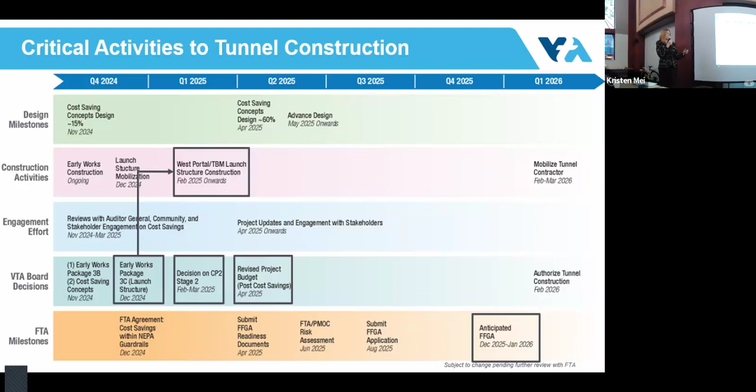Any other questions? So on here, you will see all of the activities that need to happen in board decisions, once again, to get to the point where we can do the FFGA. And what's really important on this illustration is that we have to have all of these things happen, and we have to have a full funding grant agreement to award that next big contract for tunnel and track work.

It's a big contract, so we have to demonstrate that the project's fully funded. So all of these steps leading to that are critical. So we are doing everything we can to really stay on this new schedule, to get the project going as it currently is, and then be able to continue with the large contract.

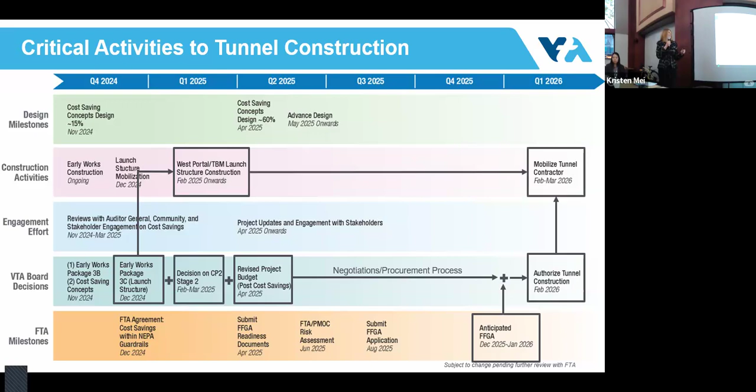So for our FFGA application, this is the strategy I talked about a little bit before: engaging you all, getting your input on the cost saving candidate changes that we proposed.

And we've really let the board know where this group and our design review committee members' input has already made some tweaks, as far as some of the station configuration elements. Such as, we started at 28th Street Little Portugal with a round station, then we went to a square, and now we're back to a round. At downtown, we've gotten a significant amount of input.

We had started with kind of a very domed roof, and then we had flattened the roof, and now we're back to the dome. I know we may have some other slight tweaks on how that's displayed visually, but we're working through that with you all and have relayed that to our board.

And I think we're going to be doing some kind of summary document, because I think it really helps to have all the input that we've got down on paper. As I said before, advancing this design really helps us get informed decisions on the next contracts and everything.

And then we have applied for about 100 million in state grants. Thank you all, I know some of you have provided support letters to help us in doing that. So we're working that gap from both sides, looking at every opportunity in addition to cutting costs on the project to see what other kind of revenues we can tap into. And then we'll have our final revised project budget so we can submit our documents to the FTA.

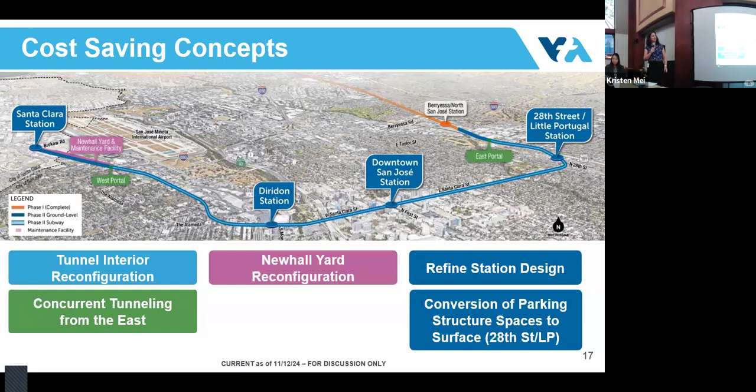For the tunnel interior reconfiguration, we're continuing to analyze efficient internal structures to simplify the design and construction methodology, to cut costs there. We're continuing to analyze that moving forward.

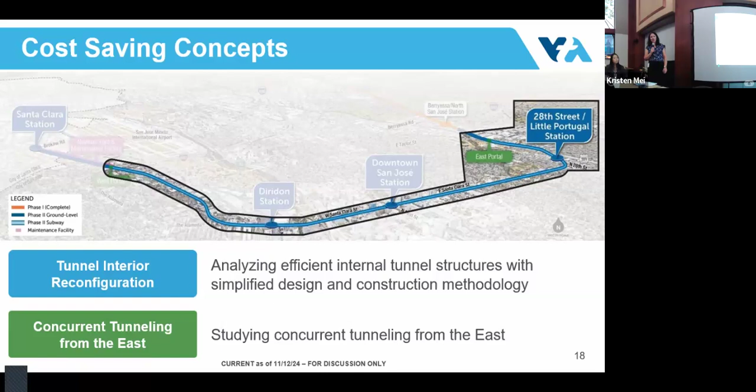We're studying concurrent tunneling from the east, as well as the single bore tunneling planned from the west. We're evaluating options in close coordination with BART regarding vehicle storage capacity and the different maintenance areas at the yard, and what we can do to refine costs. And at the stations, we're continuing to work with you all and the community to implement the vision for the stations, optimizing the facilities while maintaining the passenger experience.

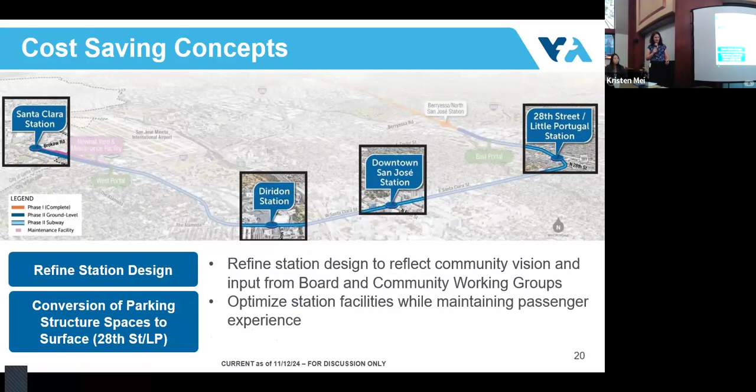So we're going to do a little deeper dive into these. Question: tunneling on both sides would require two TBMs, right? Correct—tunneling from both ends, the east as well as the west, would require multiple tunnel boring machines.

So we would expect the cost savings to come from reduced time. Yes, the cost savings for that option would be associated with schedule savings from being able to tunnel from both directions to reduce the overall tunneling time.

On the coming slides we have evaluation criteria, which we've shown before, but as a quick reminder: pluses are a positive change, equals are no change, and negatives are a negative change. So the indicator is associated with the change, not the cost. The evaluation criteria haven't changed from what we showed before: cost savings, O&M costs, access and orientation, TOD and placemaking, station presence, passenger experience, and sustainable design. We walked through these with you at the October 8th meeting.

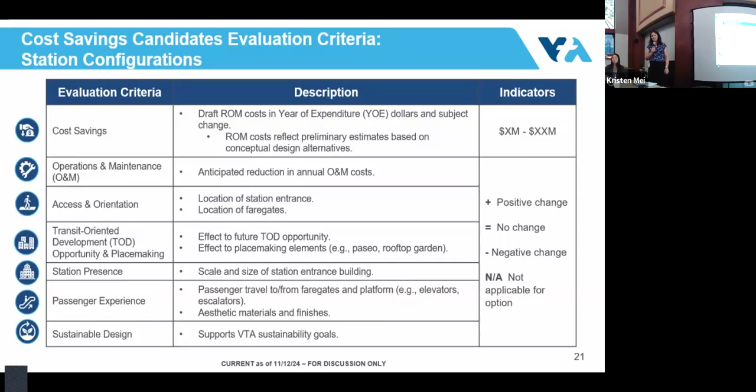So we're going to cover all four stations at a high level. Here we have an updated rendering of the Santa Clara station that has a smaller size station entrance building roof, and maintains the orchard pavilion concept that was reviewed with the design review committee.

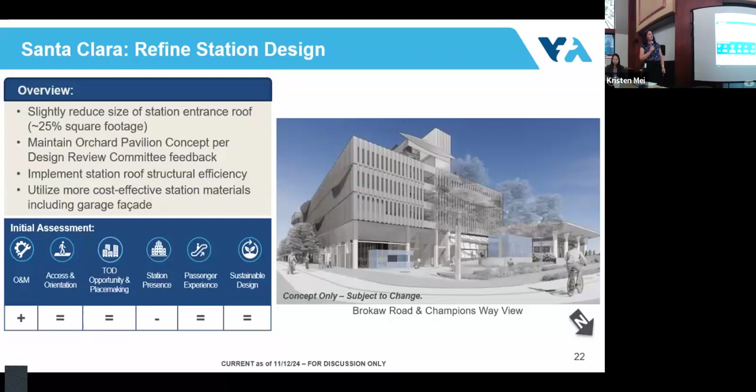We're utilizing across all stations more effective, cost-effective materials, as Greg has mentioned in previous presentations. So today what you're seeing on the screen is an in-progress update of these renderings of the stations that don't have any color at this point, and will have a much different look when we add in the color and different finishes. We'll have continued design review committee engagement next year on this, followed by public engagement about the look and feel. But this is the first update of where they are today.

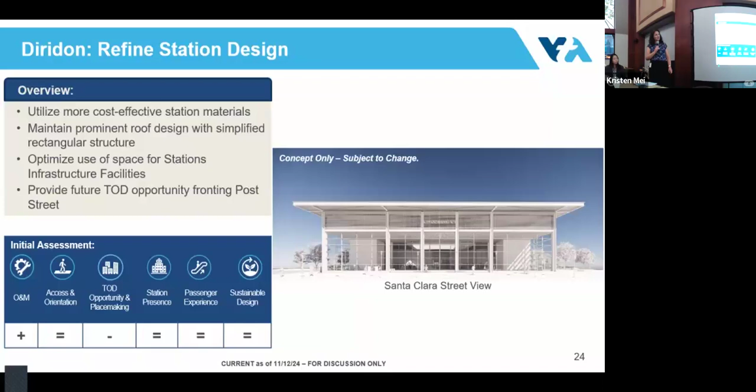Another view of the current concept of the Diridon station. So these are in progress.

And downtown, we're going to maintain the iconic station presence based on our previous discussions that Peter went through at the meeting in October. You see where the roof design is taken all the way down to the ground with the continuous arch around the station front, maintaining the efficiency of the station infrastructure facilities within the station building and in the plaza area to the north of the station, adjacent to the future TOD. And emphasizing the Santa Clara Street entrance as a gateway and the facade there, as there's an entrance into the TOD in the back as well.

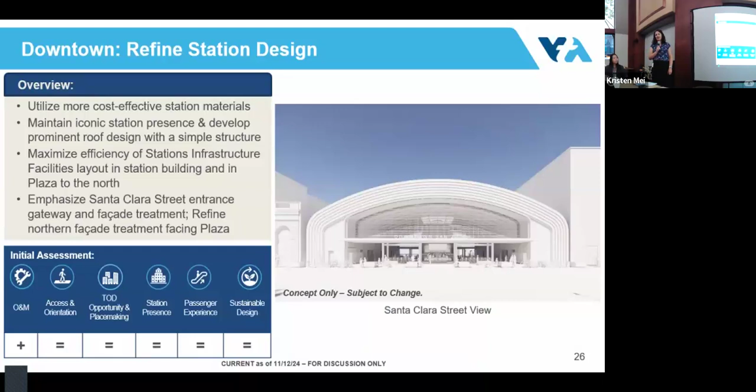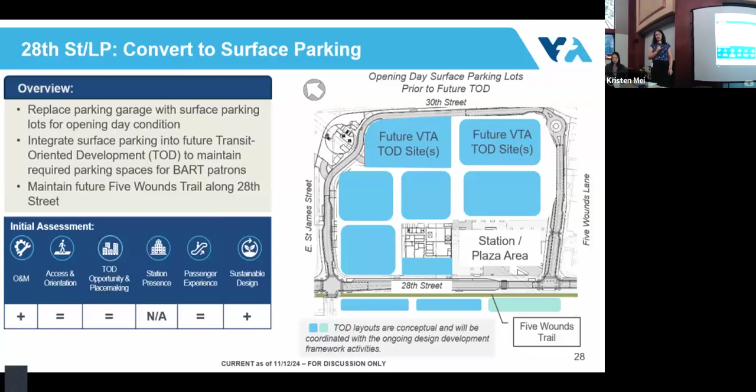And then 28th Street, as mentioned, replacing the parking garage with parking in all the blue squares you see there on the screen, that will be integrated into future TOD in the future. Still all while maintaining the future Five Wounds Trail location shown right at the bottom on the west side of 28th Street. For the 28th Street station, we've changed the roof line to be back to a circular roof line based on the community feedback.

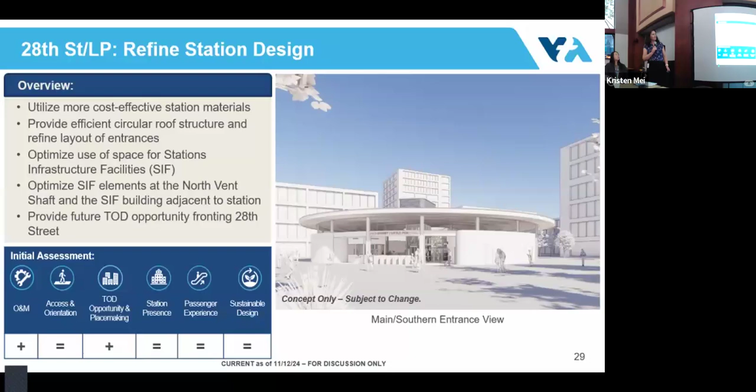We are optimizing the use of space for the station infrastructure facilities. We moved some of them more up to the north ventilation facility, provided for some ground floor leasable space in the above ground station infrastructure facilities building. See the concept here on the right. Here's another view. The station infrastructure facility building is there on the right side of the screen, and that's the commercially leasable space on the ground floor.

So that's what we have today for the stations. In particular, we wanted to see if you all had any additional feedback on the downtown or Diridon stations, as you're the Downtown-Diridon group.

Sure, one question on the Santa Clara station. The downtown San Jose station is between Market and First Street, where the Chase Bank building is, and the entrance will be on Santa Clara Street.

And the Diridon station, where's all the infrastructure going? Something's gonna go behind the station on the ground floor, correct, some underground. So the station infrastructure facilities will be above ground at the back end of the station, and then some of them will be on the roof as well. But we were able to shift them, so there's still room for a future TOD development on the block at the south end of the block.

A lot going on with them in total, but even after cost-cutting, they're still very attractive stations. I think we'll be very proud of those. Thank you.

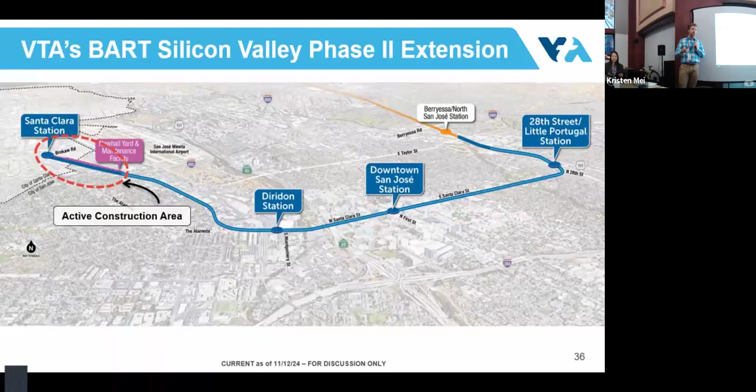Bernice talked about the critical decision the board will be making on this structure next month in December, and that will lay out the schedule and path forward for how the structure is built for the actual machine when it arrives on site.

So there's been a lot going on, it's pretty exciting out there. There's a lot of utility work happening within the yard, connections to our public facilities. We're connecting to water systems, to sewer systems. The yard didn't have a lot of those connections, or we needed to relocate them for the convenience of the contractor. They're doing electrical work, moving PG&E poles out of the way. Old stuff that the railroad left there years ago is being cleared off the site.

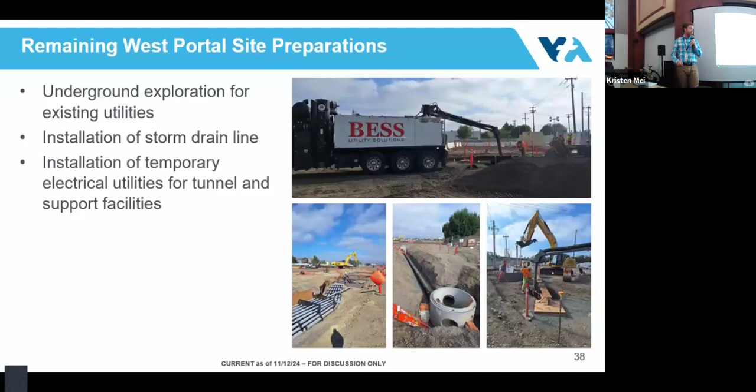We need to put a lot of drainage on this site as well, so there's a lot of new stormwater work, drainage work going on. It's fun to watch the big equipment. We have a video in a little bit that can show you what it looks like.

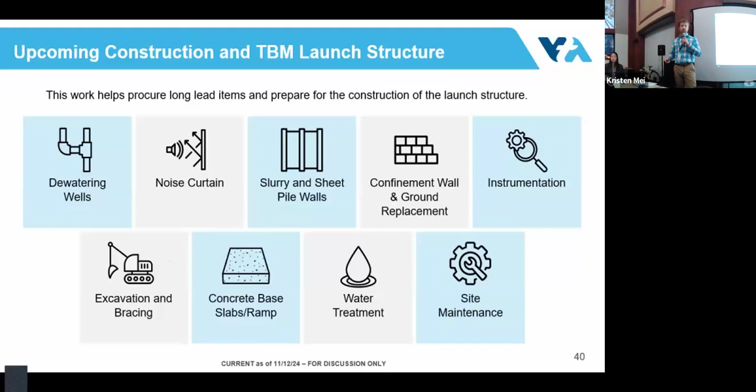And then there's a lot of water treatment that's needed as well, so you'll get to see some of those in the flyover video.

So this is a drone aerial video that we're going to show for you all. It starts on the southern end of the site, so it starts looking north right now. 880 is behind you in this video, and the drone is going to fly north over the site. I'll try and narrate a little bit.

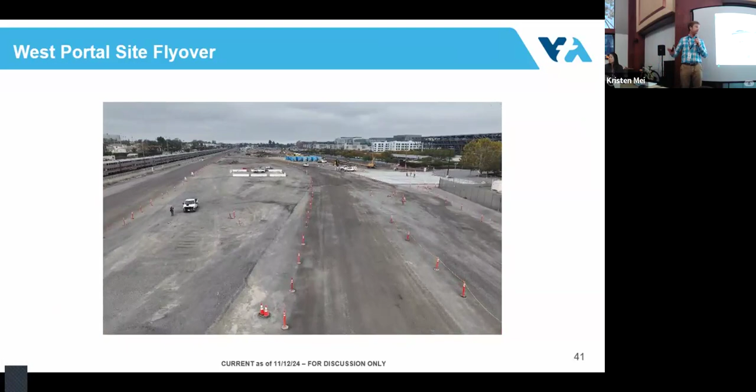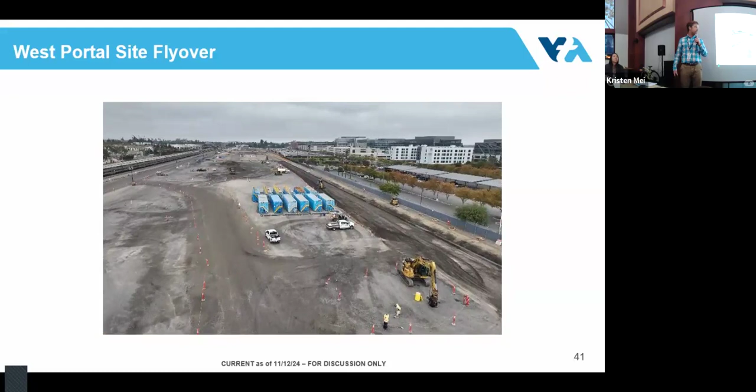You can see the Caltrain tracks there on the left and our residential homes. The Earthquakes stadium is to the right of this, PayPal. You can see these big blue tanks here, we call those Baker tanks. Those are our filtration systems that are allowing the contractor to filter all the water on the site.

Doing a lot of grading here on the right side of the image. Got the big grader out there, it's cutting a new entrance. Kind of the brown fabric you can see coming into the video, this is part of our drainage ditch right here.

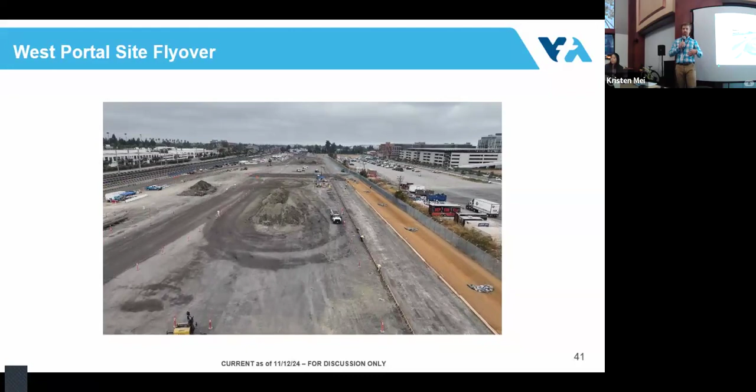So this site was very uneven. They've had to import a lot of material to make it level or move material around on the site, treat the site, make sure it's compact and ready to receive a lot of the heavier equipment, or build some of the factories and buildings that we need to build here. We'll be manufacturing all the tunnel liners on this site.

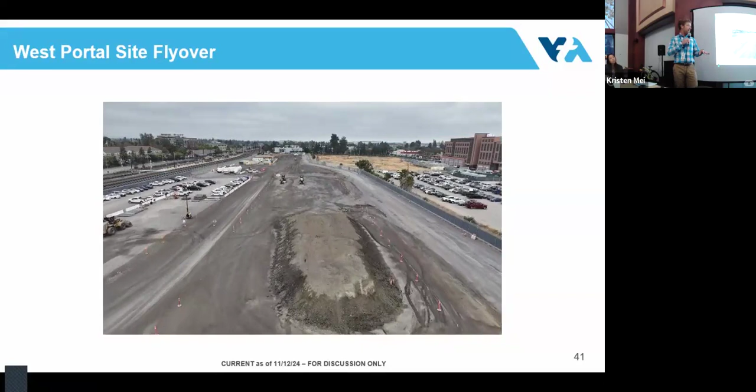So on the northern end of the site, we're about halfway through the site here. We'll have offices, so the contractor has their offices on the other end of the site here. We're approaching kind of the bend of the site here. This is where the eventual parking structure will start.

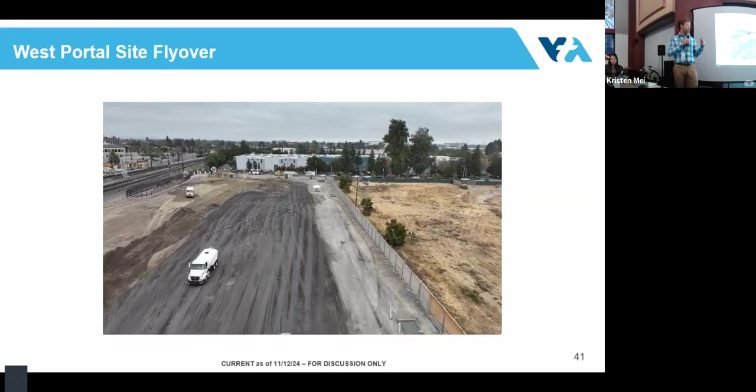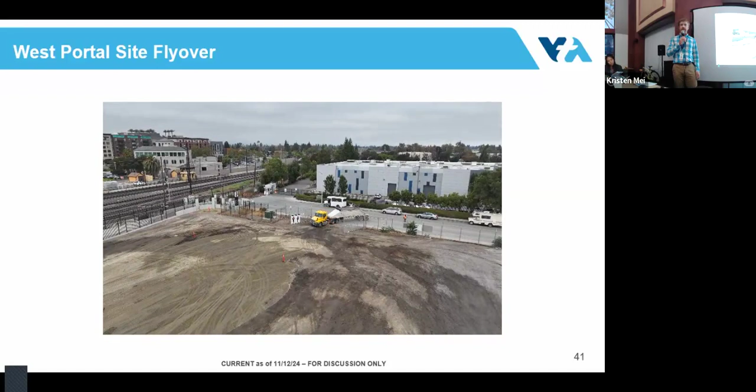And then we're entering the area where the station, the tracks will be on the left. The station and the parking garage will be on the right, and we're looking at Brokaw right now. So this is our Brokaw entrance on the left, and as the drone pivots to the left, it'll be looking at the bicycle pedestrian undercrossing that goes under the existing Caltrain tracks, connecting to Brokaw there.

So there you go. Yes, Ron. Thank you.

As this site matures with more and more activity, will the only entrance and egress and exit road that comes with it be Brokaw? Because the intersection of Brokaw and Miller is pretty testy. There's a hospital there, and the times I've turned out it's very, very long. Are there plans for another entrance?

To repeat your question, Ron asked how many entrances there are. We have two entrances and exits, one is on Brokaw and one is on Newhall, kind of behind PayPal Stadium. So we use them both for different things, and we have a traffic management plan that says when and how many trucks can use those entrances.

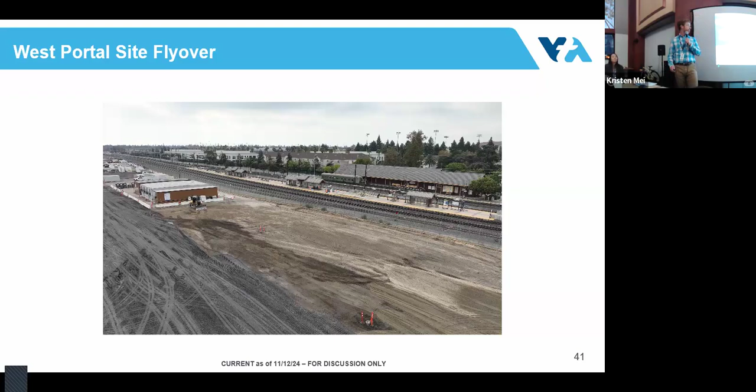Okay. Any questions online? No questions online.

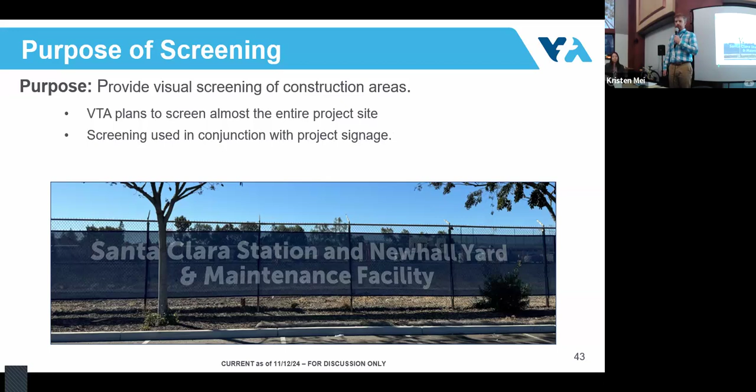Okay, we'll move forward. We wanted to talk a little bit more about construction screening with you all. So this would be fencing or screening that we'll put up at our construction sites, and we have some examples of what it looks like at our Newhall Yard. We plan to have screening at all of our sites, where the stations are built: Diridon, Downtown, 28th. And here's the example of what it looks like now out at the Newhall Yard.

We'll also have opportunities for project signage and some co-branding. There's a long lead time on a lot of the screening, it has to be ordered months and months ahead. Some of our key partners had interest in co-branding, so we were able to work with the Earthquakes as an example here. I think some other partners in the room have interest in co-branding as well, near their facilities.

But this provides a little bit more privacy between the construction site and our neighbors, and is cleaner than your typical post and beam kind of hodgepodge construction that you sometimes would see. You're also going to see other signage on the project as well.

So our Thriving Business Program - we get that kicked off when heavier major construction starts. We want to be launching that. We'll be using our fences for that to do some marketing for businesses, particularly in our business cores like the downtown or at 28th Street.

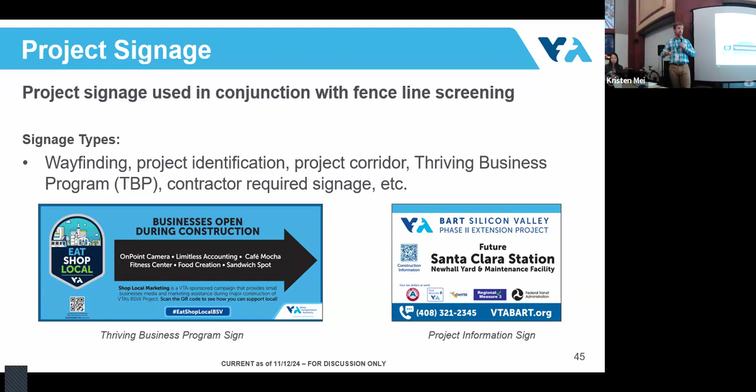We may have other wayfinding signage - how you get here, can you go this direction, if you need to find this key place, how do you get to that place. Particularly during some of the really important events that San Jose and Santa Clara are going to be hosting in the coming years.

Question from Chris. Brent, thank you very much, appreciate it. You know, this comes from the right place - we want to push you guys to be better. So the fence lines are okay, but there's definitely a sense of kind of a NASCAR feel to them

We'd much rather do that than have the NASCAR feel to it. So take that as a very positive critique, not a negative. I know you guys have a lot of information to share.

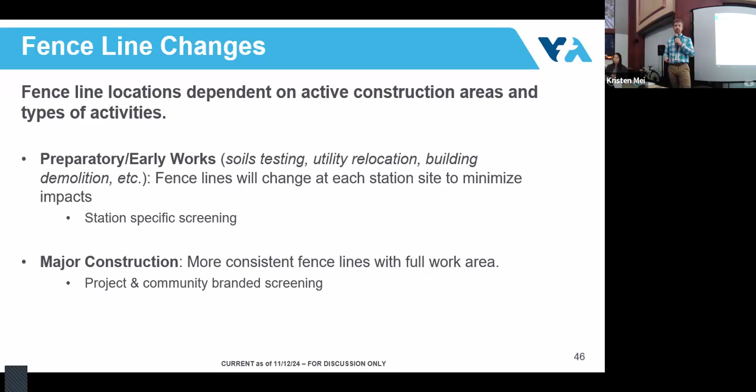Just wanted to note these really important events coming up, right, a lot of eyes, more eyes than normal. The Super Bowl, March Madness, FIFA World Cup coming to the area in '26. So it's our goal to work on these things for sure before then.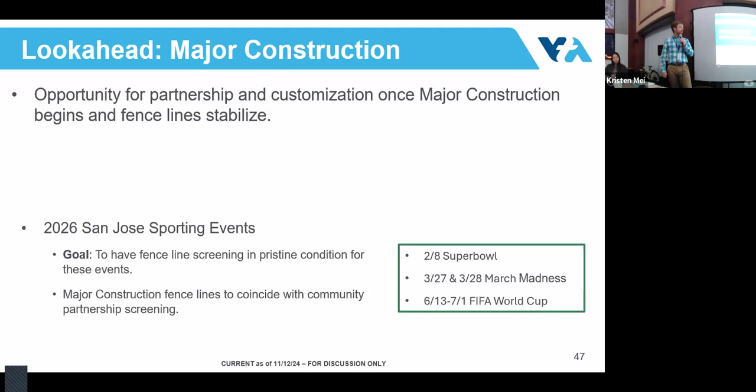Last thing construction related we wanted to go over: we get a lot of questions about what happens when VTA or the project has to buy property, and what happens after that exchanges hands. So we wanted to dive into that a little bit with you all, just to let you know what goes on behind the scenes.

So when VTA acquires property, usually there's an initial phase of things we have to do. We'll often have to do environmental assessments. We may have to turn off the utilities, do demolition, or do some more testing, things like that.

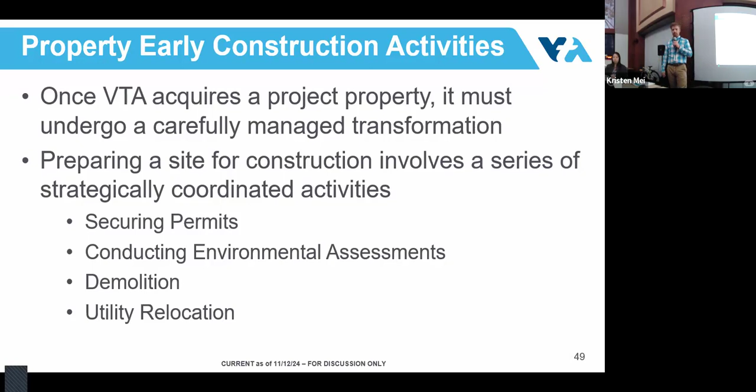Typically this is pre-construction work, not the heavy major things, but we'll often set up security as one of the first things that we do, either through our contractor or through VTA. We do an assessment, we have to survey all the buildings nearby to make sure they don't settle, put markers on them. We have to get permits typically for that.

One of the other first things we do is work with our utility providers. If there are buildings that come down, we have to turn off the gas, the power, the water, so we don't affect those things. Things happen in construction, right? So we try to minimize those risks up front.

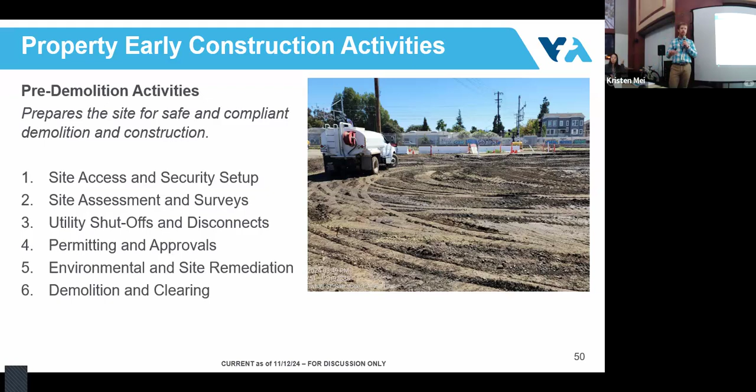On some of our properties we have to do demolition. We've got old buildings or buildings that have to be remediated, come down, or cleaned. Those have to be permitted, and we have to work with the city as well on those.

Once that happens, typically there's other preparatory work. We might do soils testing or additional grading, kind of like what's happening at the West Portal now — all that early preparatory work: setting up the construction site, getting the trailers in for the contractor, maybe doing some additional stormwater work.

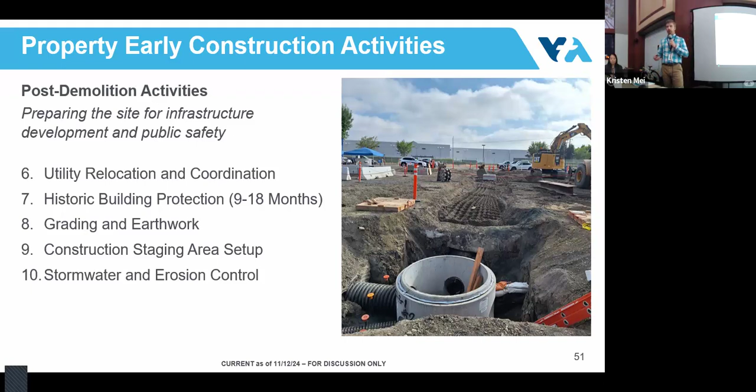Throughout this, we want to make sure you all are informed. One key way is at these meetings, but we really encourage the public to subscribe to updates based on the station you're most interested in, so that when we send out construction notices, you're told of early work, late work, long work, how it will affect you, the timing, what will be happening, whether it will be noisy, and how long it will last. That's really important. We typically do that on a station by station basis, and we have about 6 categories you can subscribe to for notifications.

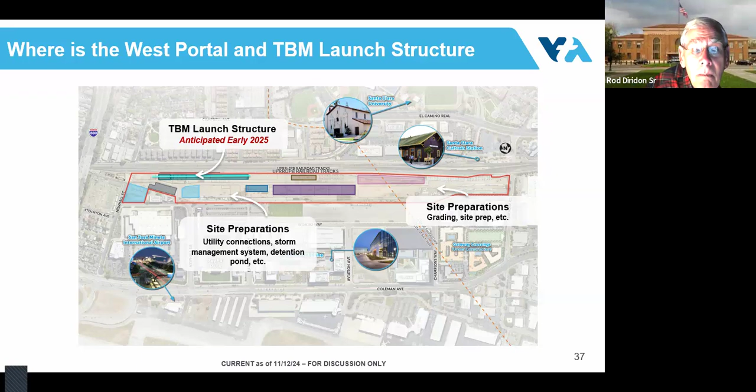And this was right at the beginning of your presentation, the flyover? Yes. So where the flyover started is where the launch structure, we refer to it sometimes, will be. Okay, thank you. Also called the West Portal. Yes, there's 2 portals, a West Portal at Newhall and an East Portal south of Berryessa.